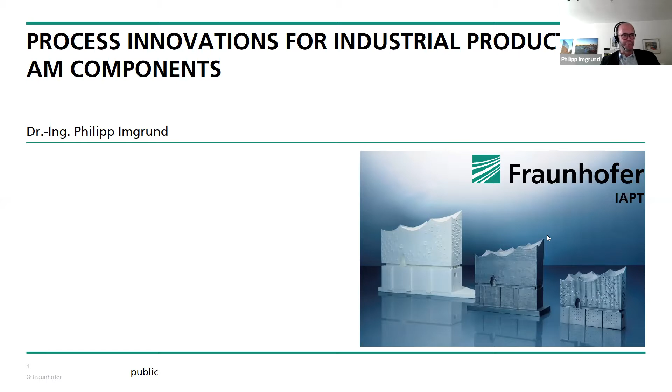What you see here on this very first image is an additive manufactured replica of the Hamburg Concert Hall, which is quite famous for its architecture. So you already have a little insight into polymer processing, directed energy deposition, and binder jetting technologies, which we used to rebuild this at a very small scale. But of course, we want to talk a bit more about use cases and technologies today.

I have brought with me use cases from the automotive sector that we're working on, a use case from the aviation industry, and to finish off, some words on future technologies or future sectors where additive manufacturing is heading from my point of view. And of course, I'll be happy to discuss with you what your view on this is.

Let's start off with a first introduction to the Institute. We created a mission statement when we were founded around 4 years ago, so we're still a quite young institute. We felt that lots of academic institutions and industrial companies dealing with additive manufacturing still see it as a prototyping solution for rapid prototyping.

We defined the vision to bring additive manufacturing technologies into production and make them viable production processes for industrial components. This means we deal a lot with correct design of components. I lead a department developing stable, quality-assured processes and the corresponding materials.

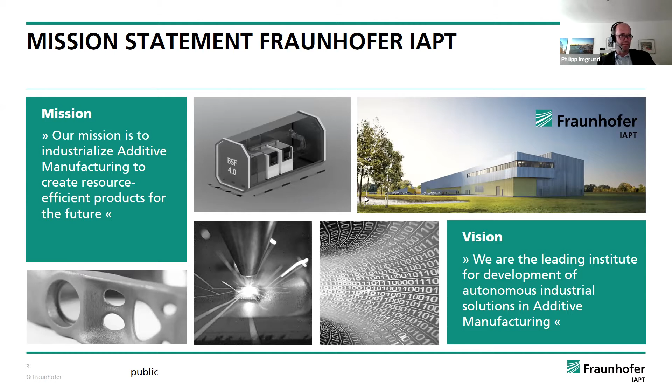We have to consider automation and digitalization of processes, as additive manufacturing is itself a digital industry. You have a data file that you send to a computer and a machine, and you print the part directly from the computer data. The last component is post-processing technologies, planning of factories, and container concepts for decentral production, which is a project we have with colleagues from Fraunhofer USA. The basis of our work is the technologies and machine systems we have, and the main focus is certainly laser powder bed fusion.

We have lots of machines, ranging from ones with very open access to all the steering, where we can do scientific work on the lasers, look inside the process, modify components, integrate cameras, thermal cameras, high temperature heating, and optimize gas shields. But as Fraunhofer is defined as an institution which should help get components into application, we also have a lot of industrial machines where we work together with industrial customers to qualify new materials and transfer technologies to them.

More recently we have been looking at Sinter-based technologies, which I'll explain later in more detail. We also have a third group dealing with polymer additive manufacturing, very much what is considered 3D printing - home 3D printing, fused filament fabrication, industrial fused deposition modeling, and powder bed processing by selective laser sintering.

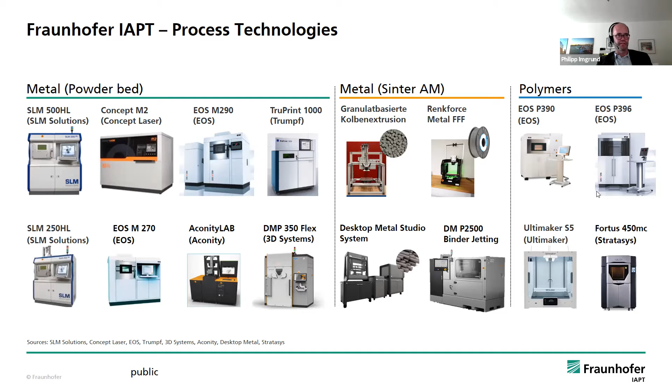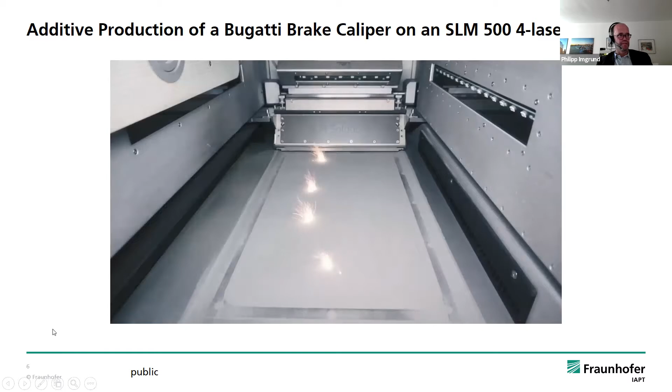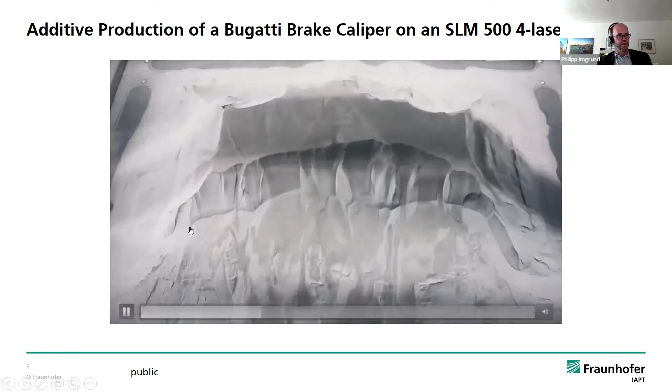Starting off with a use case from the automotive industry - I hope you can see the video. This is a view inside the powder bed process. You see four lasers manufacturing a part from the powder bed, and here already you see the part being extracted. After the build is finished, the build chamber is brought up, and you see there's still a lot of manual processing, which isn't yet good for automation.

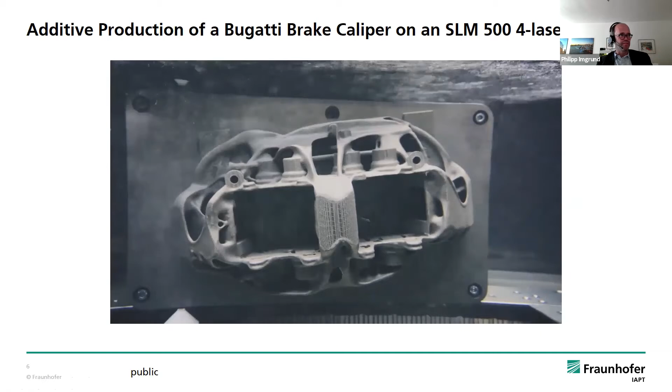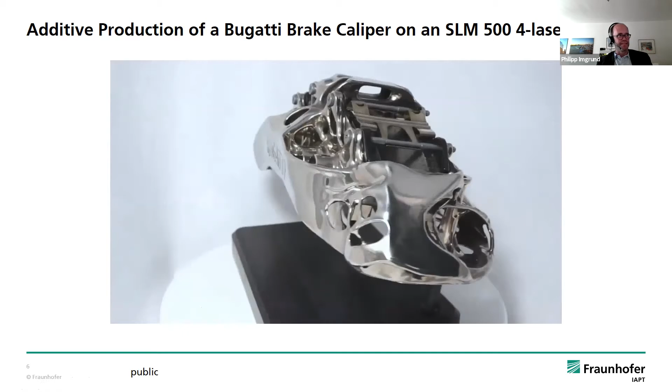It makes it slow and expensive, but you have to cut the part off the build platform, and you come up with a very nice component. In this case it's a brake caliper from Bugatti, which we manufactured on our SLM 500 four-laser machine - a machine very much dedicated to production rather than R&D.

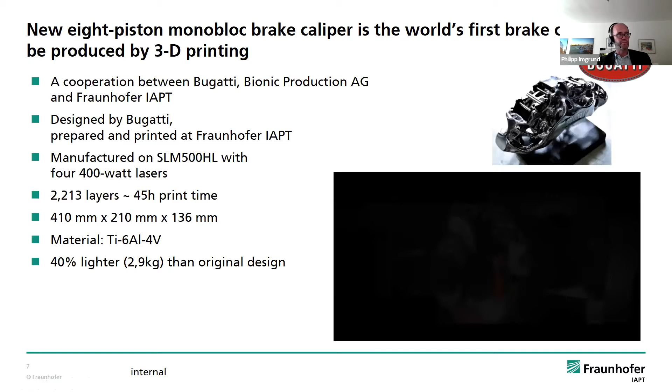To give you more details: at the time we did this, in 2018, when we had this collaboration, this part was the largest titanium 6-4 part that had been printed by laser powder bed fusion. The idea was to go from a very traditional design to really taking advantage of the possibilities of redesigning parts for additive manufacturing, designing the supports needed so they can be extracted well, and delivering a first real use case for automotive.

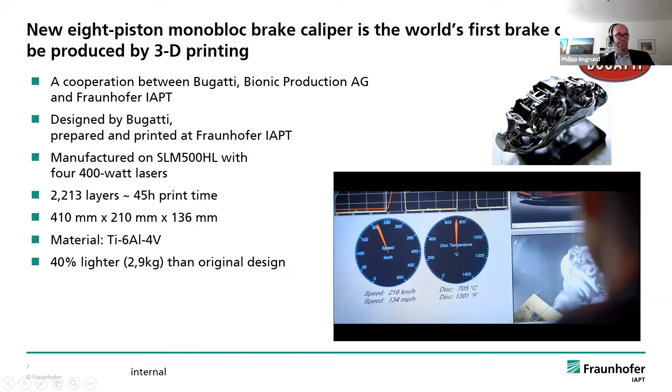In this video you see a brake test conducted at Bugatti - here's the brake caliper and the brake disc. The speed goes up to nearly 400 kilometers an hour, roughly 230-250 miles an hour. It's quite impressive to see these tests. The part passed the tests, and now if you can afford a Bugatti Chiron, you can also have an extra with the additive manufactured brake caliper.

It can be ordered. Of course this is a perfect use case because you don't really need to consider costs so much - at Bugatti, cost was not such a big deal. But if you want to go into production of parts and look at serial production of cars, to take advantage of the benefits of additive manufacturing, you have to look into other materials and process costs to bring them down. The titanium aluminum powder already costs about 170 euros per kilogram, which is about $100 per pound.

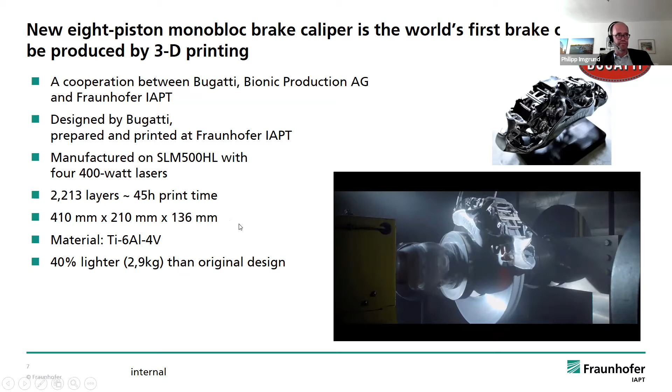In another project conducted together with Fiat Chrysler Automobiles, we went a step further. This is a wheel suspension which integrates a brake caliper. Our design engineers did a nice job including air channels, heat shields, and the brake caliper itself. So you have the whole wheel carrier and suspension made of one part in one print.

It's made in an aluminum material, which is of course way cheaper than the titanium component. I want to point out the weight reduction of about 36% compared to the standard manufacturing process, and the part size is in the range of even bigger than the caliper. This is one of the keys, from our point of view, to additive manufacturing: to integrate different designs, integrate different functions, and really make a benefit out of the process that is offered.

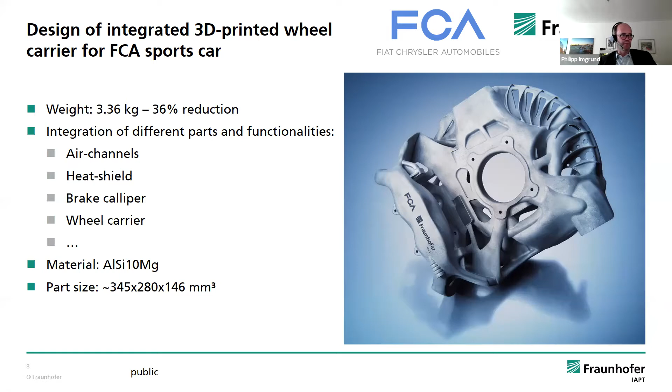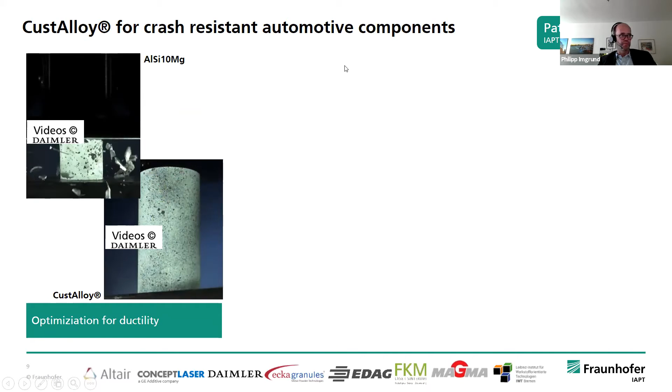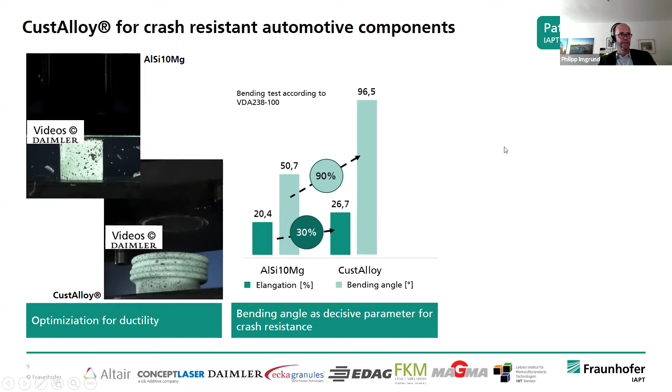I want to briefly give an insight into our daily project work. This is from our project where we tailored an aluminum material called CustAlloy for elongation, for crash-resistant automotive components. If you see the comparison between a standard state-of-the-art aluminum alloy and the new alloy, I can show this video again. You see the part folding together in the testing, expressed by a high bending angle of the part. So we are able to have materials that are well qualified for the use case.

In case of an accident, you need the crash absorption, and you need to pass these tests in order for the material to be qualified for the application. This is an example where we are looking at optimizing an alloy specifically for the application it's meant to go to. Again, we have similar weight savings due to the redesign possibilities here.

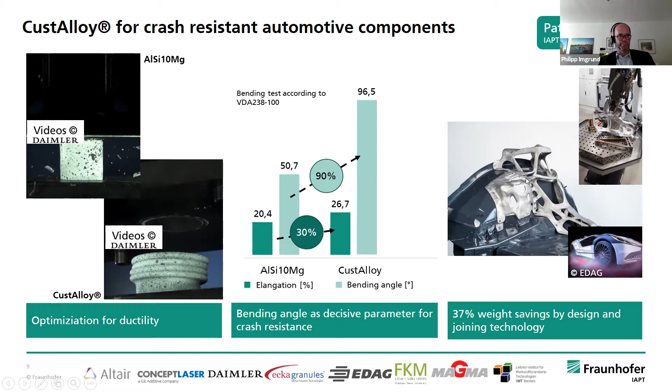Very briefly touching on the story before aluminum development for additive: starting from the standard aluminum silicon 10 magnesium, which is in the range of 200 to 500 megapascal tensile stress and elongations around a maximum of 10 to 15%, very standard. We can go for new alloys like this CustAlloy I just showed, which has more flexibility in its mechanical property range.

We're also looking at very high strength materials, like this PLM 905, very high strength, where we sacrifice ductility, for a brake disc application. Together with a company in Germany, Fehrmann Alloys, we're also developing the AlMiGo alloy, which provides elongation up to 40% after heat treatment at a specific tensile strength area of around 400 megapascal. This shows the variety you can achieve with material science. As a material scientist, I have to show this, and I hope it finds your interest to some extent.

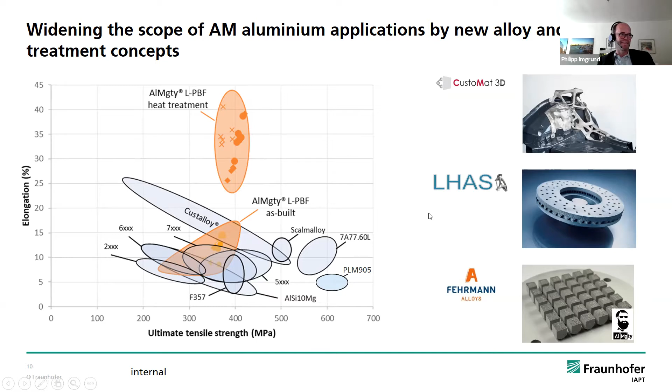For aviation, this is mainly where the success story of metal additive manufacturing started, using the design advantages I've already spoken about on the automotive side. The first parts were components for optimizing the gas stream in the front of an aircraft. We now have possibilities for reducing sound pollution by having inner porous structures dedicated for sound absorption.

I've mentioned part integration already with the FCA example. The first example here was a fuel connector for Airbus, where we integrated 14 single parts into one, with a cost saving of about 50%. And of course there's the topic of bionic design, introducing bionic features given to us by nature, where we want to look at material efficiency and save more weight on the parts, especially on an airplane.

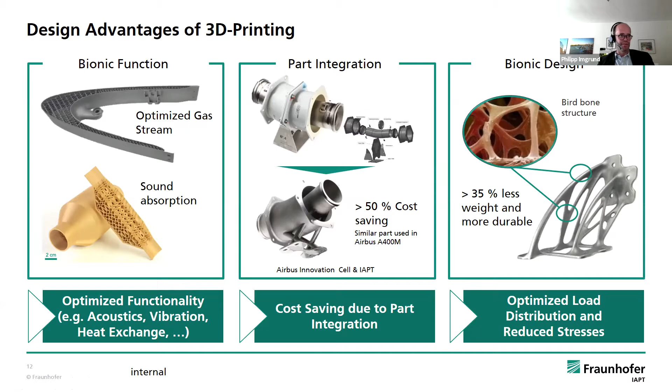Each pound you can save is worth a lot of dollars in terms of saving fuel and carbon dioxide. We had a large European collaborative project dealing with developing bionic design and incorporating it into all sorts of aircraft components. Here you have a picture, a vision that was once formulated by Airbus - a bird-like aeroplane. Our project started before this was launched, but we may have contributed to it.

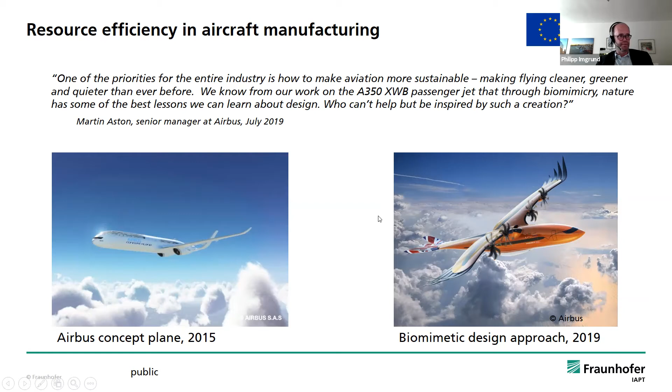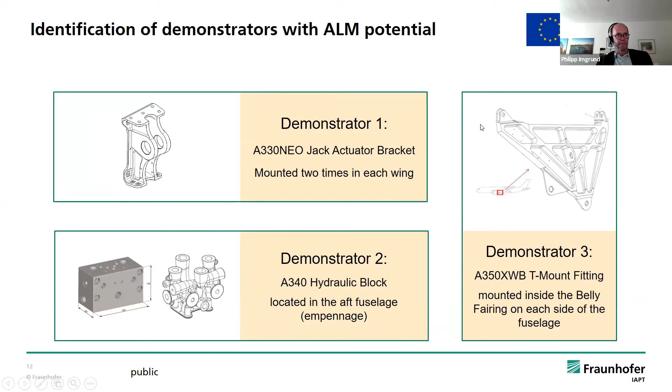I want to show you some components we designed and developed during this three-year project. We identified from the Airbus A330 a jack actuator bracket, from the A340 a hydraulic block, and from the A350 a big T-mount fitting which supports the wings. You can see the location of the demonstrator components: the actuator bracket actuates the flaps, the hydraulic block is in the rear of the aircraft, and the T-mounting fitting is in the inner structure supporting the wing.

Our task was to find new materials and new designs to enhance the buy-to-fly ratio and to reduce weight of the components.

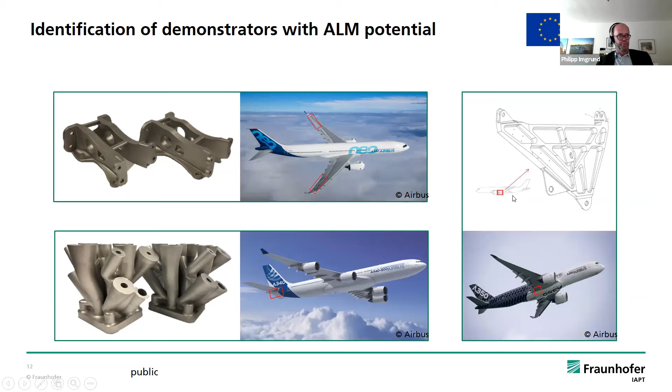These are the additive manufactured parts we ended up with, and the bionic optimized designed parts. I think the most impressive one is this block with machined channels at first, and now it's a completely redesigned additive manufactured part with optimization of the flow and pressure losses.

I want to show you how the parts look in more detail after production. This is the actuator bracket for the wings, and this is a T-mount fitting also for the inner structure of the wings. Of course, in this time it's scaled, not 100% the part, but smaller because it was an R&D project. Upscaling is a task for Airbus after the project.

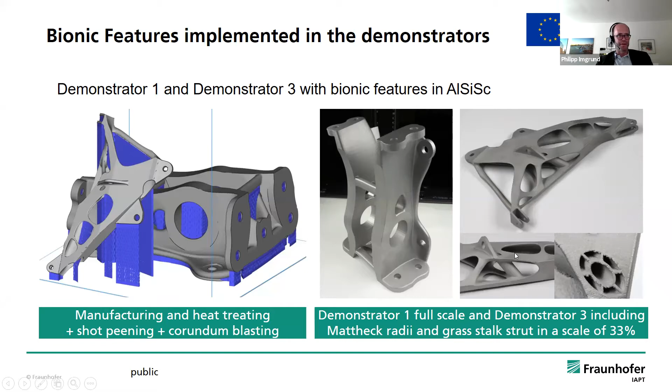You see the design features, the bionic design features we've implemented here, a grass stalk structure, and some really nice Mattheck radii. Maybe you're a bit disappointed that it doesn't look that sophisticated. It's not always the outer looks, but sometimes little details that make a difference on the performance of the part. On the whole, we managed a reduction of 30 to 35% in weight on all these components.

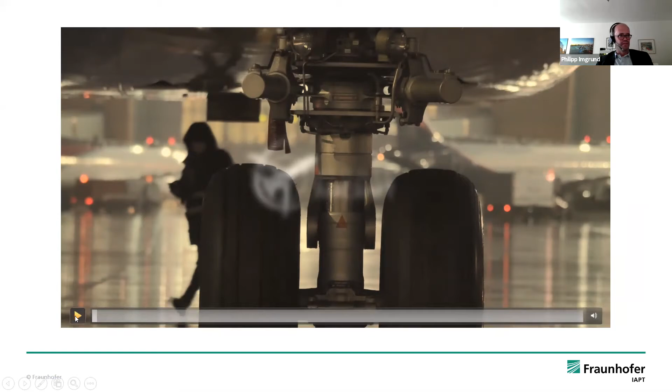I want to show you a little film. I hope you can hear the sound. Otherwise please let me know. Well, when I was in an airplane for the very first time, is the sound coming to you? Yes, yes, we can hear it. Okay, alright. I saw on the window how the raindrops were starting to accelerate when the machine accelerated and took off, and I thought, what a powerful machine this is.

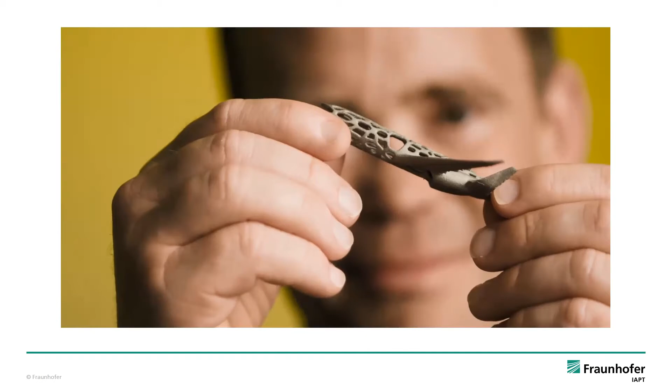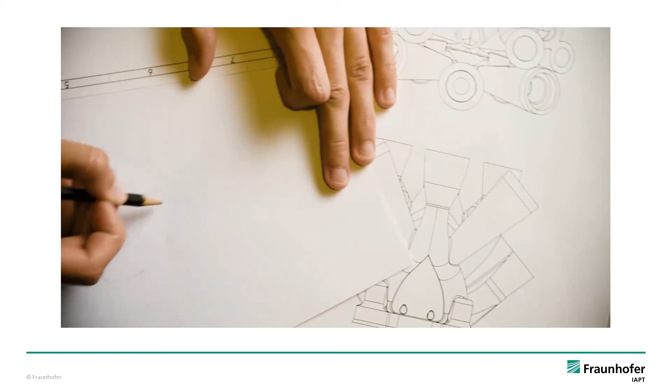These powerful machines emit more than 2 million tons of carbon dioxide every single day, making a destructive impact on our environment. The need to reduce these emissions is of the utmost urgency. The goal of the Bionic Aircraft project is to contribute to reducing emissions by applying additive manufacturing technologies and bionic design principles to structural parts, thereby decreasing the weight of the components.

Bionic design takes nature as its inspiration. Living organisms are known for their remarkable material efficiency. It is through using as little mass as possible that they are able to protect themselves from physical harm. Nature gives us proven concepts throughout millions of years of evolution, a blueprint of what is possible.

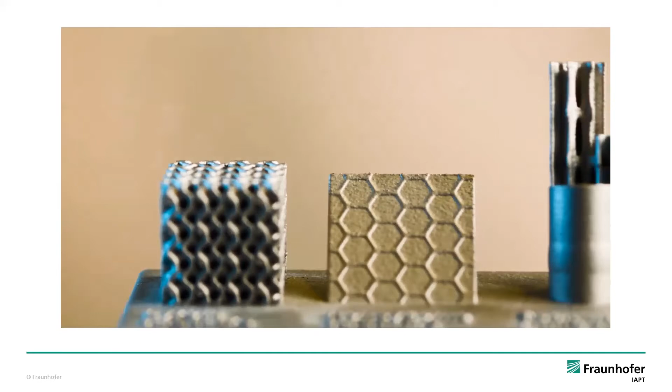We have the microstructure of butterflies, which is transferred into lightweight volume infill structures. Honeycomb structure as a surface stiffening structure can make it more resistant to compressive loads. We have the grass stalk structure to improve strut-like structures and make them more resistant to bending and compressive loads.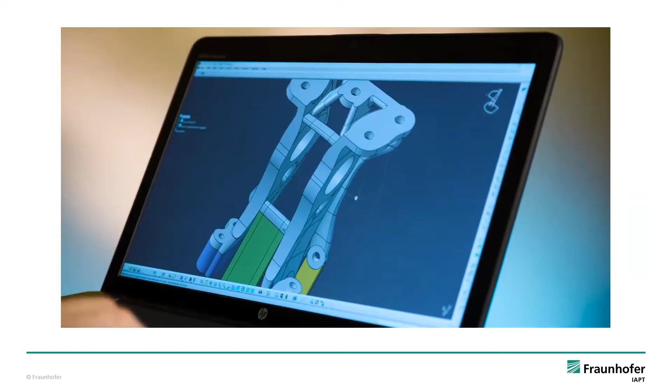To automate the design process, a software toolset has been developed that is capable of parameterizing the bionic features. As a consequence, the design can be converted to a CAD model with just one click of a mouse, ready to be printed.

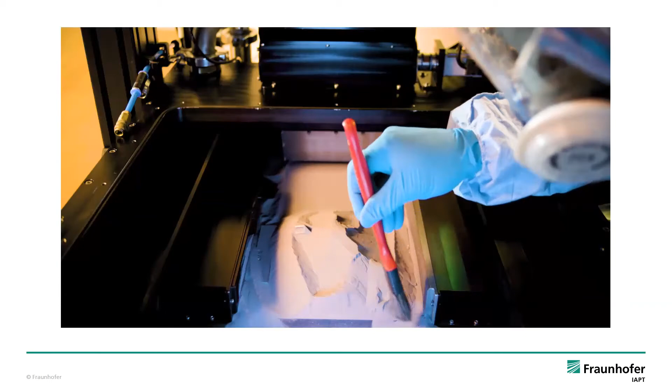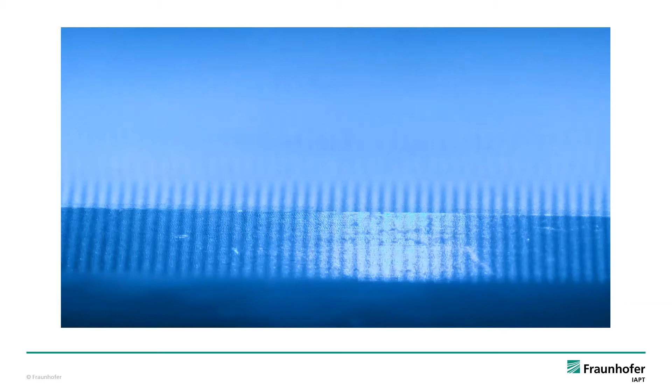We're working with the process of laser powder bed fusion as an additive manufacturing process. The main advantage is that we are building up the parts layer by layer, using nearly 100% of the material. Studies have shown that the powder can be recycled multiple times without any loss in quality. In order to verify the quality, a camera-based system performs a 3D topographical analysis of the powder bed and the manufactured part.

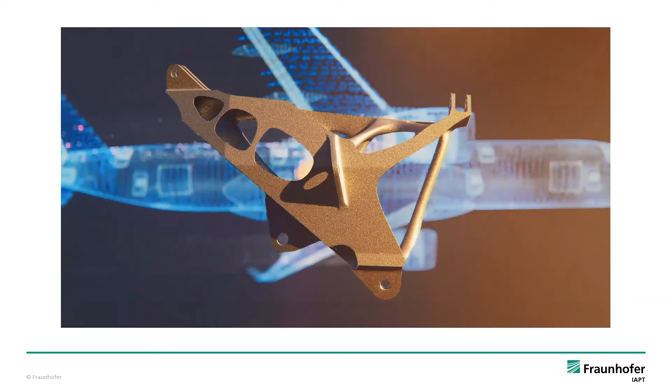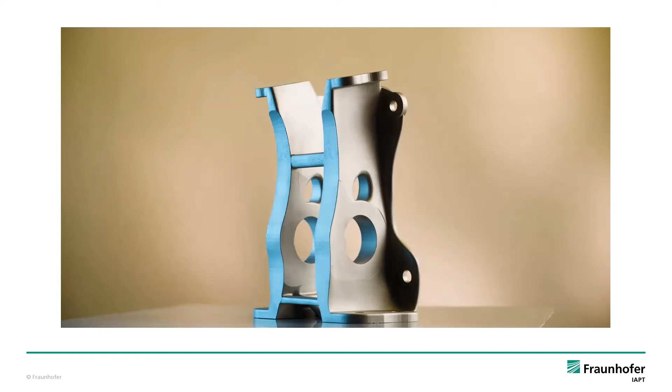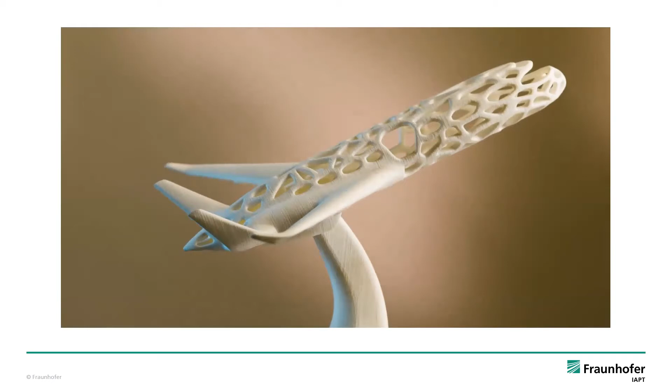The actuator bracket is used for the wings. Further testing techniques and repair strategies contribute towards the increased service life of these components. We are achieving up to 35% lighter components compared to standard manufacturing processes. Through additive manufacturing, there's so much more possible with regard to complex structures and organic designs.

We are kind of pioneers in this technology. Within the next 5 to 10 years, we will see a lot more additive manufacturing and bionic design parts flying in the air.

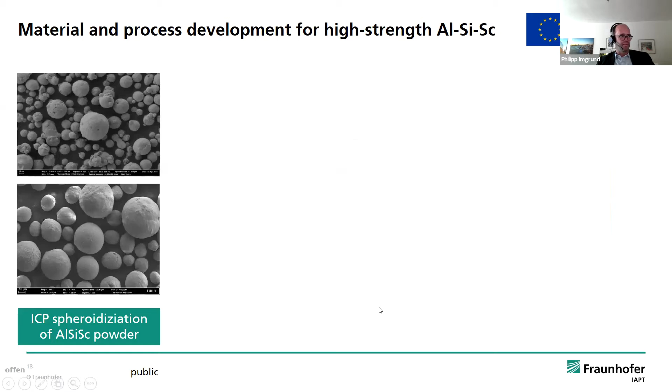So I hope this was a nice insight for you, not limited to just materials and processes and the design, but you see also the aspects of quality assurance and software development that we've been tackling in that project. If you have any more questions, just let me know, and I'll be willing to answer as good as I can.

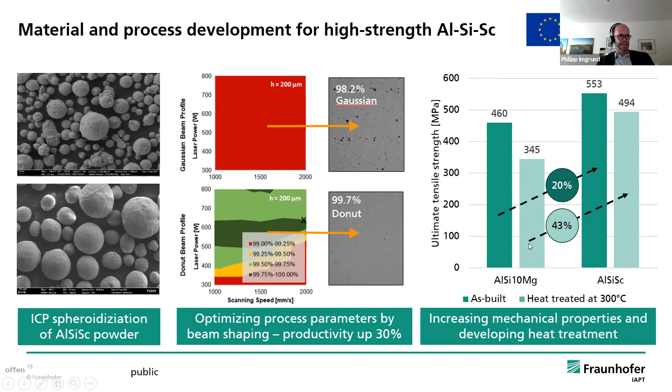So this is also a bit of a more technical insight into the project task that we've been covering there. I hope I'm not too long. Final chapter with regards to future technologies and applications.

I wanted to give you some insight into sinter-based additive manufacturing. The technologies I've shown until now are all about laser powder bed fusion, so direct melting of the part layer by layer in the powder bed by the laser. Here we have a different approach. We're using either a metal powder bound into a polymer matrix and processed by filament, like the standard 3D printing process you may know from your home printer, or by the so-called binder jetting, where you don't use a laser for consolidation, but an inkjet head that prints ink and consolidates the powder.

I have a video on that in a couple of slides. The main advantage of the pellet printing or filament-based printing is that it's quite cheap, you can use cheap machinery, and it's well usable for prototyping, up to 10 or 20 parts. It's way cheaper to use than laser powder bed or binder jetting.

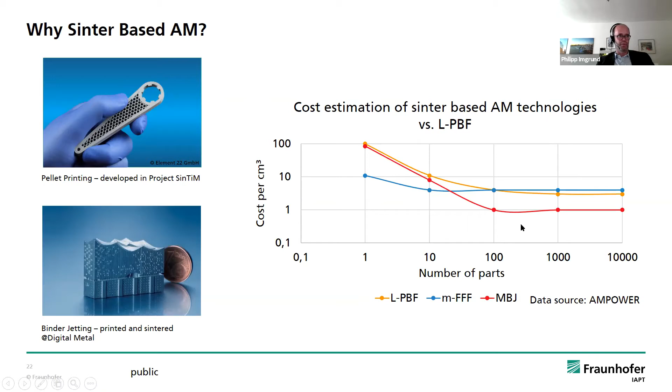And the binder jetting process really gets you to lower cost, about €1 per cubic centimeter, in ranges of more than 100 parts if you want to produce higher lots. This is because in this process you can put more parts in one powder bed, and you don't need as much post-processing to get rid of support structures as in the laser powder bed process.

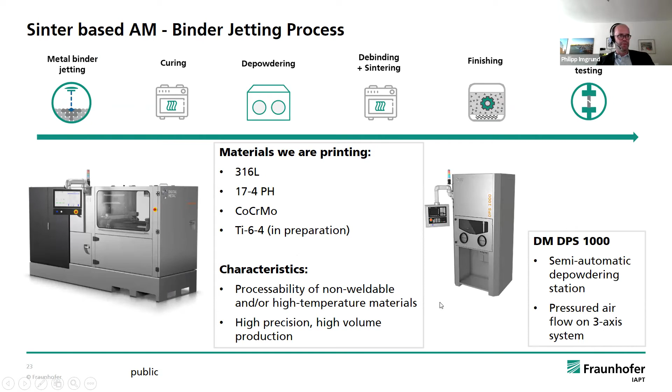So we're dealing with this process. We have the first materials at hand: stainless steels, cobalt, chrome, and titanium alloys. We can also process non-weldable materials. I want to show you this.

Here's a sneak peek at the process. You see the powder bed to the left. After the powder is dispensed, you have the inkjet printer that prints the ink into the parts. Then after this printing process, you come to curing, depowdering, debinding, and sintering. So it's a multi-stage process.

The main advantage is you can really go to very tiny and precise structures, in the range of 300 microns, 200 microns wall thicknesses. We've been doing one project, currently working on one, which is these little towers you see here. These are finger implants, used for repair of finger joints in case of arthritis.

Usually you have to fix the joints, or you use some silicone implants, but here you can really adapt to the patient, to the defect for the patient. You can produce patient-specific implants in a really, really fine detailed dimension for the very first time. These are the first prototypes made in stainless steel by this technology. The next step for us is to transfer this also to titanium, standard titanium 6-4, or titanium tantalum alloys, for even better integration into the bone, which is the challenge on the medical side of things.

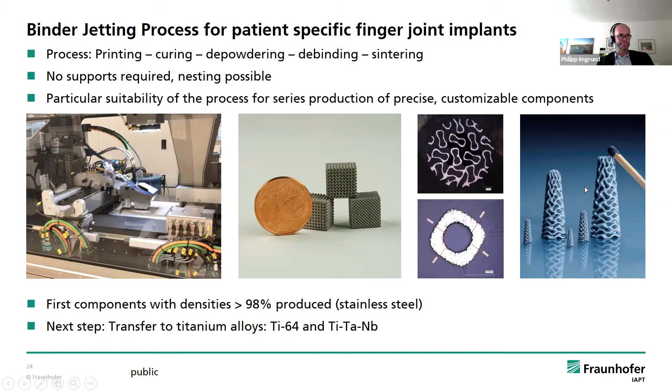The really nice thing is that you can use such regular structures in the CAD to design your part, and it's very much scalable. It's very easy to redesign parts with these structures. You can have the function of osseointegration here, so that the bone really grows into the implant very well. We're doing mechanical testing together with colleagues from IWM, the Institute of Material Mechanics, and we're looking towards automating the design for the implants by an artificial intelligence algorithm we're developing here.

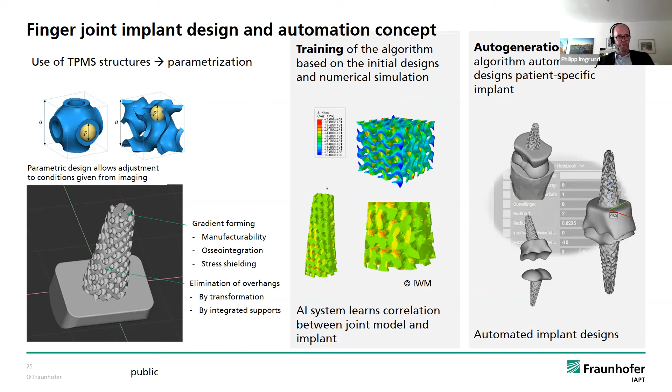I'm not going into the details of this too much here. Just the message is that automating implant designs, really coming to patient-specific solutions with a highly precise process, is the main idea here.

So to finish off, the final use case or future outlook is mobile additive manufacturing. This is rather on larger additive manufacturing components. So how can additive be beneficial here?

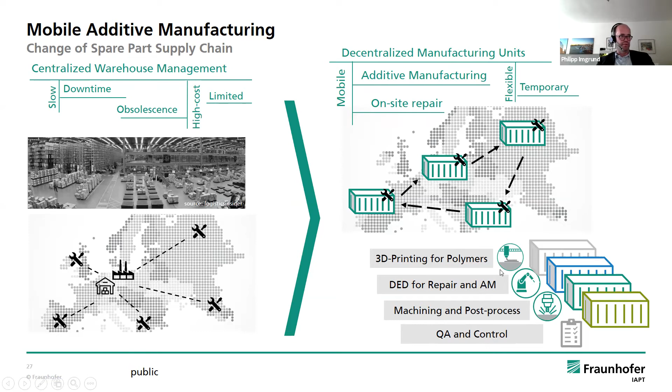Of course, right now after the COVID pandemic, you see that the logistic chains are interrupted in many places, and the idea of decentral production of parts instead of having large warehouses which cost a lot, but producing additive manufacturing on demand where it's needed, is a huge topic. So our idea is to put 3D printing units into containers that can be shipped to where they are needed, for polymers, for repair of direct energy deposition parts, or also for the sinter-based processes I've been talking about.

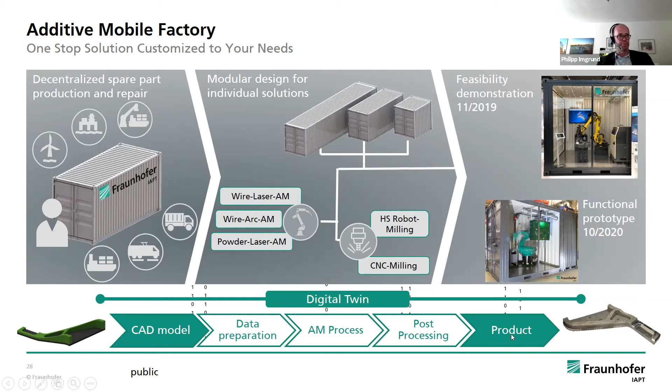The idea at our institute is to put the whole process chain into a container, including model preparation, data preparation, and post-processing. I have one more video here on the additive mobile factory, which uses a wire arc additive process. It's a robot-controlled process.

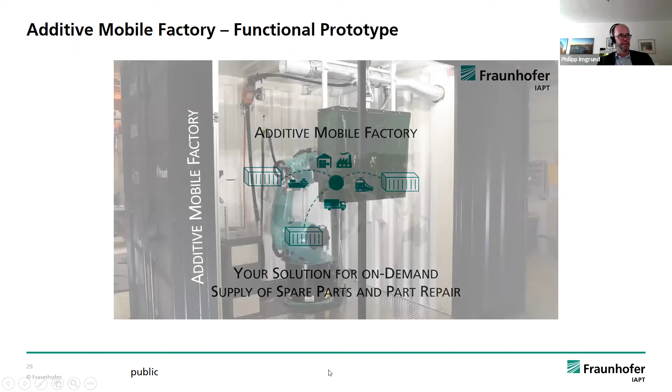What you see here is a first bottom part of the component that's going to be printed, being picked up. In the next step, unfortunately you can't really film into the process, but there is a welding process going on, the wire arc welding process, in order to weld the additive manufactured part, a section, onto the part that has just been picked up here.

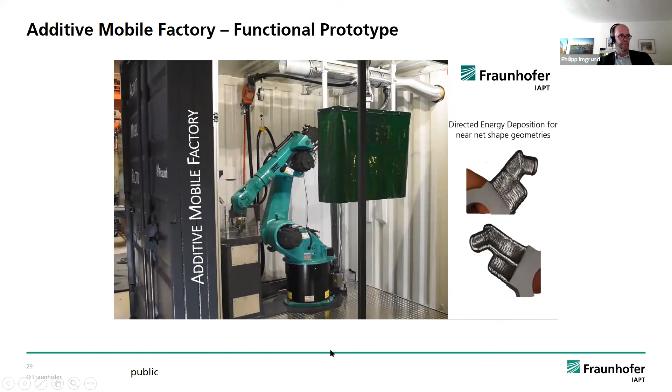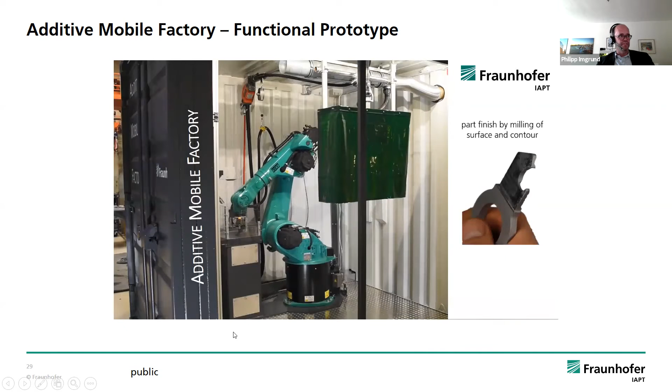The third step you can see here is the milling process, a finishing process to get the shape right. After this is finished—trying to get this a bit quicker now—you can make a first use test. So this is the idea of getting metal additive manufacturing into containers.

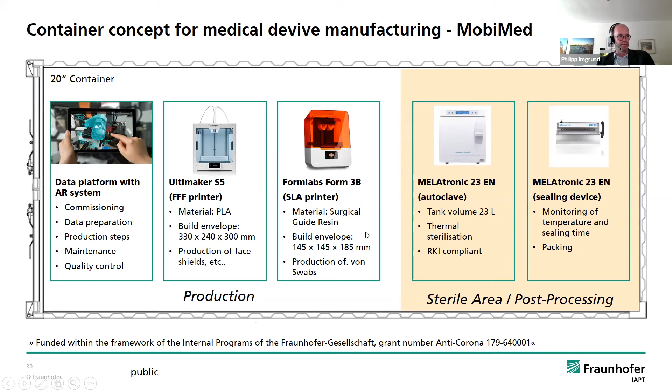The same can also be done with medical parts. This was a project where we included polymer printers into a container concept, along with sterilization and sealing devices. The idea was to produce face shields, masks, and respiratory devices to support the fight against COVID. I also have a very nice video—I'm going to switch down the sound a little. This is my final video.

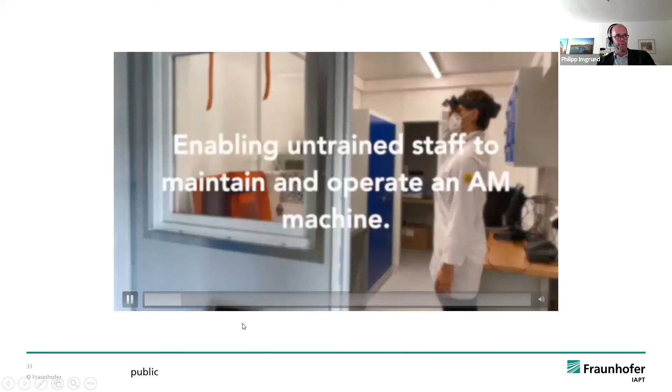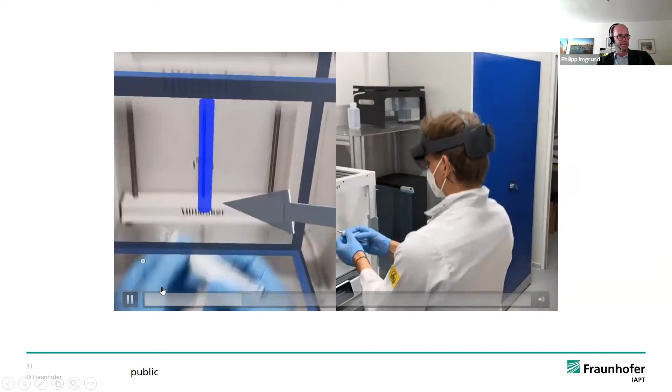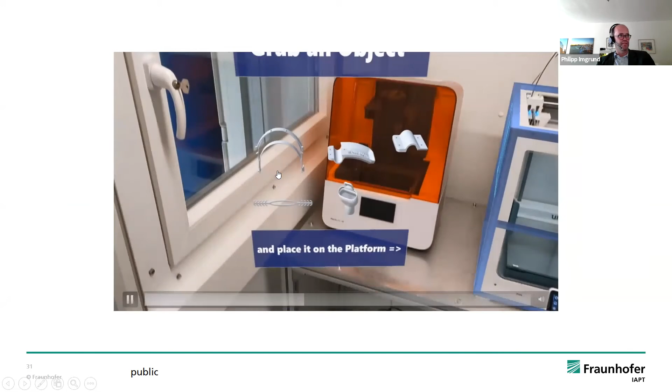You can see how augmented reality can contribute to the additive manufacturing process. If you're in an environment where you don't have an operator who knows about the process, the idea is we equip him with augmented reality glasses, and he can see what he has to do. So you get instructions on the process you have to select, on the components you can select, and how the parts should be printed.

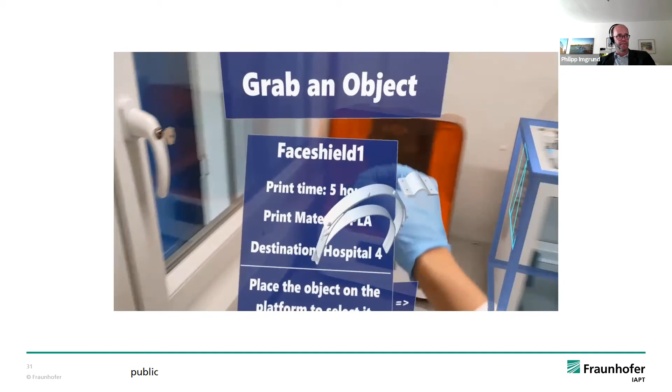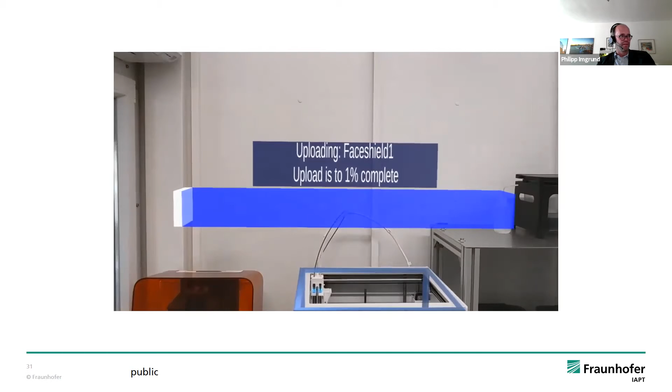He now selects, in this case, a breathing adapter, and assigns it to the printer, and assigns a face shield to another printer. In the next step, he can start the printer based on a virtual screen, by holding his hand and, in principle, pushing a button in the air, and then the printing process starts. You get some information on the process going on.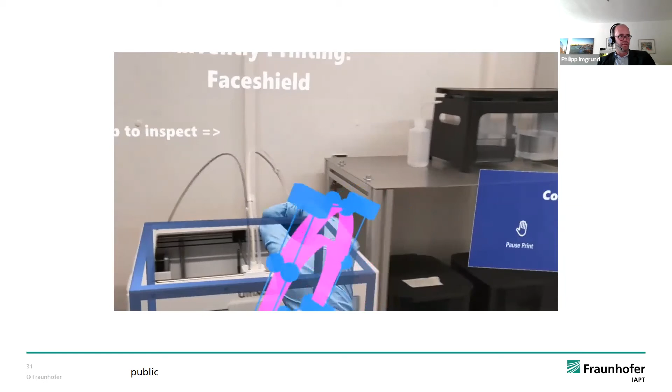In the end, hopefully you come up with a quality assured and finished part. And if you have such production directly in a container close to a hospital, the use is clear: the part will be directly printed and can be used without further logistic operations required.

We're continuing this research, as I stated earlier, in the frame of this project that we're doing with the Fraunhofer USA colleagues, transferring what you've just seen in principle to metal-based technologies. We'll be able to report on that, I think, in one or a couple of months' time, until the end of the year.